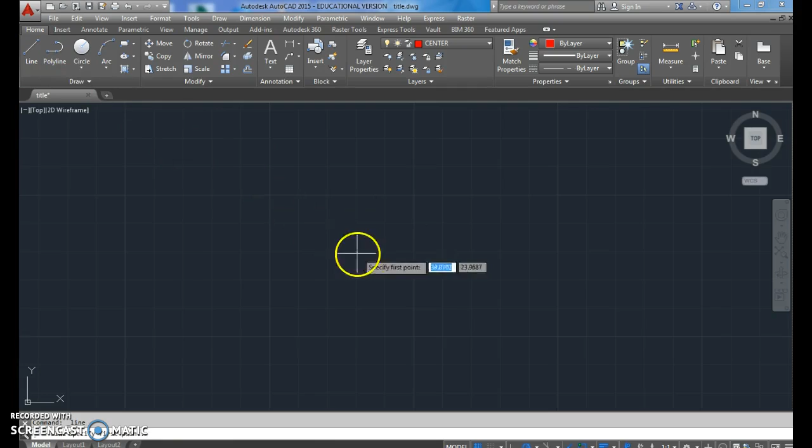Alright, I'm going to start with, actually I'll start with the center line. From center point to center point is 3.75. On the end, I'm going to make some object circles. Try to get a center diameter. Alright, the outside circle is a 2.5 diameter circle.

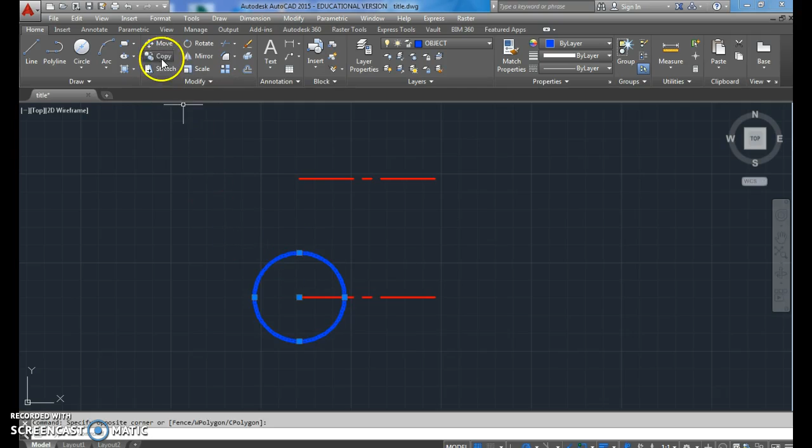Alright, this is going to be my front view. I'm going to do a top view. The length is going to be the same, so I'm just going to copy it up, keep it lined up. And I'm going to copy the circle to the opposite side. Right, the reason is they alternate which way the circle on the end is. So we can use these to get the overall length.

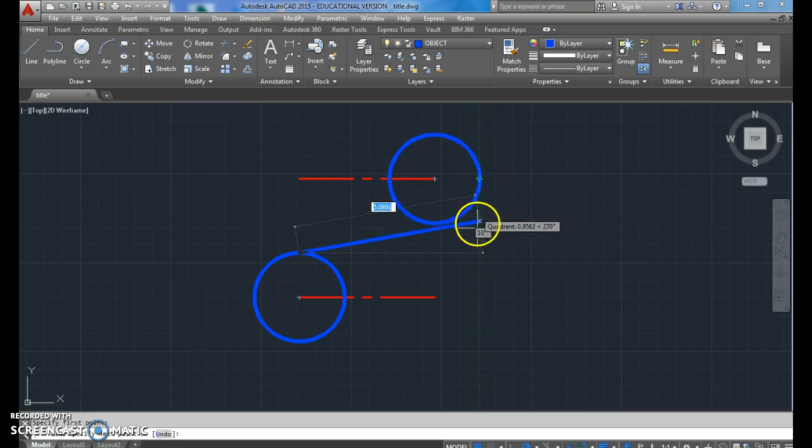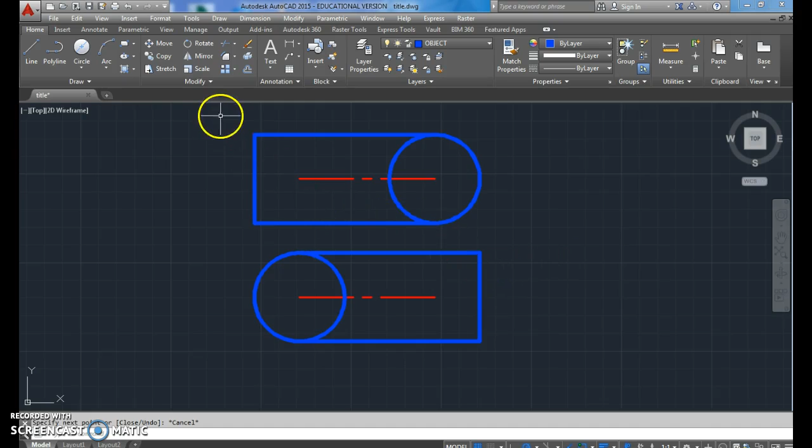So I bring the top here, bring the edge down, do my height 2.5, and connect back. I do the same thing for this one. And I'm going to end up turning one of these into my section view. I'll give you a little hint. My section view isn't going to be the right side because it's not going to show very much detail. I'm going to trim this part of the circle.

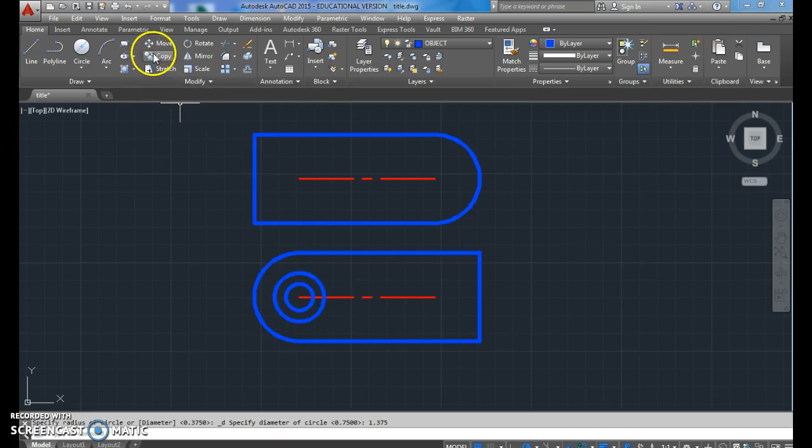Alright, now we'll do the counterbore hole here because that's kind of the next easiest thing. It's going to be 2 circles, and from the end here, here and here, they're going to look the same. So you're going to have a 3/4 diameter, and you're going to have the bigger one, which is 1.375. So, like I said, they're the same. So instead of doing from scratch, I'll copy them up.

Alright, now on this opposite side, there is a notch, a groove cut out here. It's not a square groove, it's actually a rounded depth in. So it's like I had a larger circle that's cutting through the inside of it. It's a little hard to see unless you're looking at the paper, so hopefully you have the paper with you.

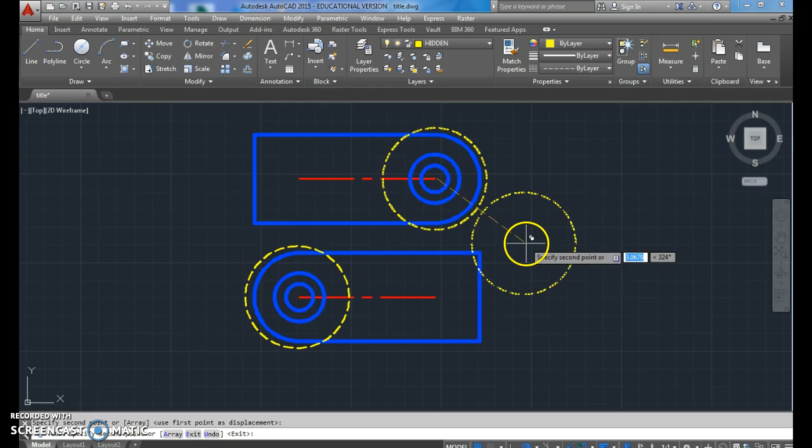Alright, so to know where that would be, in a hidden line, I'm going to make another circle. It tells me that it is a radius of 1.44. So I'm in diameter now, so I'll just double it. So 2.88. I will copy down to there. And I will trim where the hidden line goes outside. Now, that hidden line is there. It's where it should be. Basically, all the stuff you can see in between the sandwich, it's cut in and it's rounded like that.

So if I bring down here, I'll draw a line. I'll have to delete part of it. If I go down 0.75, then the groove in the middle is 1 inch wide. Delete that. So basically it's 0.75 and 0.75, then you have that in the middle. These lines will connect out.

I will trim here. Now, that's where the edge is. The edge you can see. It goes further back, see, because it's rounded. So I'm going to bring down the hidden line, bring it over, connect, and connect. So I have that one there. So for all except for one small thing, this one and center lines is pretty much done.

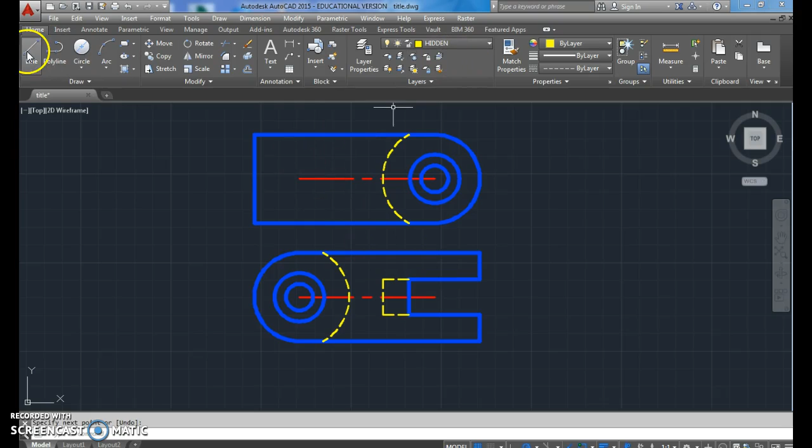The thing that's missing is the counterbore hole here. Alright, it's going to be hidden, so I'm going to bring from the edge of that circle down. The bigger diameter only goes down 0.312. Bring the other side, I get to line up, down, and then the smallest circle goes from where that one stopped to the rest of the way through. Alright, and it's on both sides, so I'm going to select that, mirror, I'm going to mirror along the center line, and so I have those there.

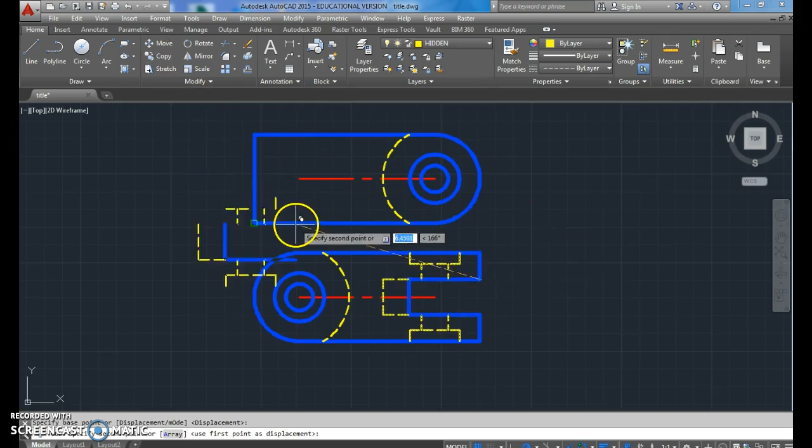Now, all this is the exact same on here, because it's the same from both ends. And since we've been doing it this way, I'll do it normal, and then we'll just come back and cut one and make it a section. So I'm going to select all this. You can do it manually, I'm just doing this to save myself a little time and effort. I'm going to bring it over.

Now I brought this line so that when I rotate it, I have a reference, because the end of this line is going to be in this corner. So I do rotate and flip it this way. Now I do move, select it, grab that, that goes in the corner, and that part's done. All I have to do is trim this little bit of object line there.

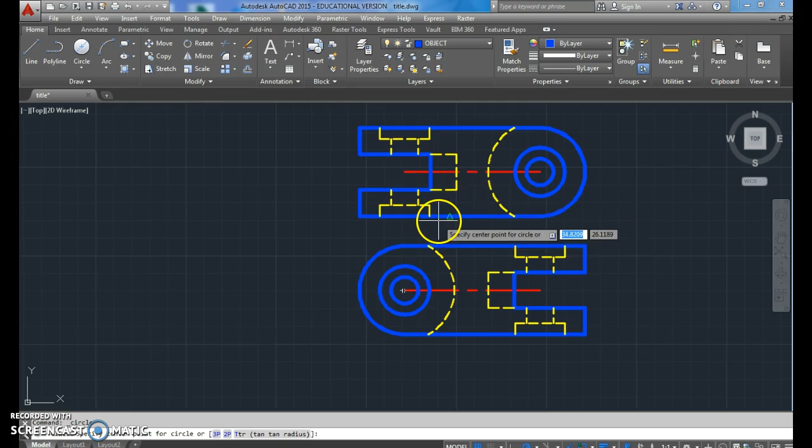Alright, now the only thing that is missing is the hole that's drilled through the middle here. And on the paper, if this was my top, it would be up here. I'd be able to see it. It's a circle, and from the center of the circle, it is in 1.875 inches. So to do that, instead of drawing a line, if I touch my mouse here, line it up until it's 1.875, hit enter, it will jump the center point over to that. Now that should be the midpoint of the center line, but just another way of doing it for future reference.

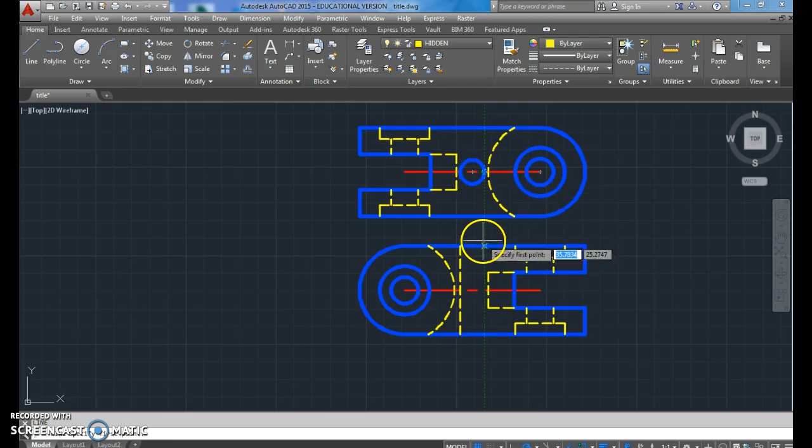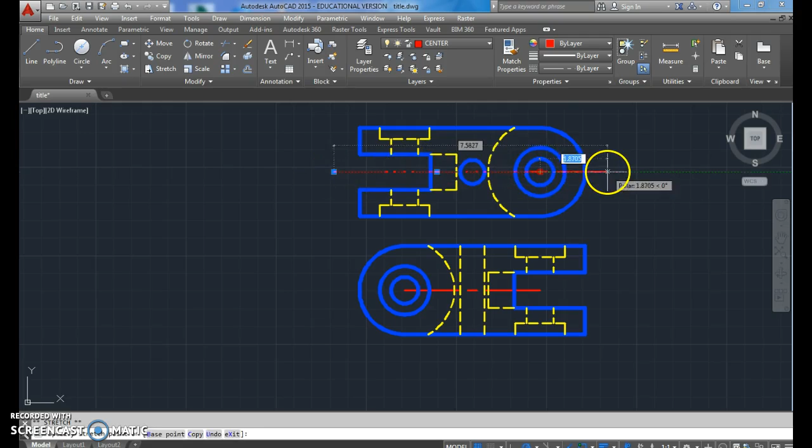Diameter is 0.675. So then I will take the edges of it, this hidden line down. Alright, so from here, again, there's center lines I have to add in, but I'm just deciding which one to make my section view. If I slice this one, I will get a little bit more detail than if I slice this one. So I'm going to extend the center line, change it to section,

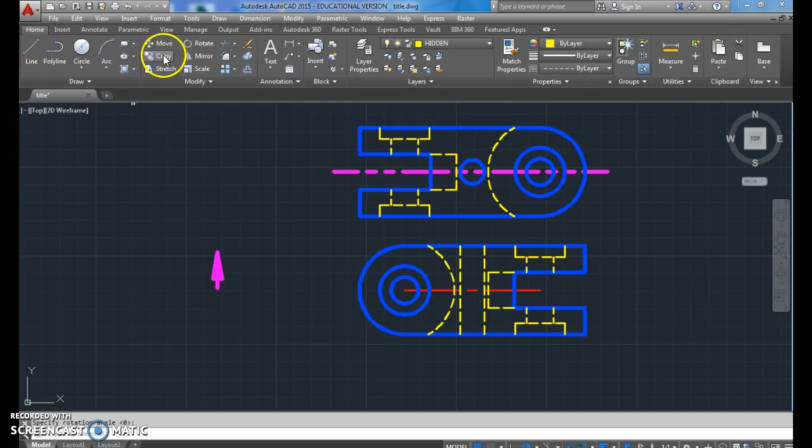add in my arrows, escape that one. And the arrow is going to face up. So I'll put them on the ends of the lines. Alright, now in here, I'm going to change all the hidden lines to object lines.

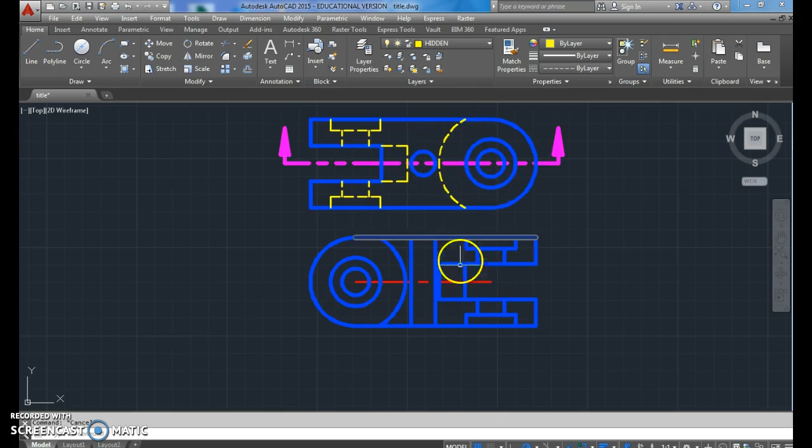Alright. This edge, because it's being cut through there, was here, but it's no longer there. It will be on the back side, so you'll leave it in there, but this is going to be empty space. You have your hole here, this circle you would not see whatsoever, because if it's cut here, you see the small one, but you won't be able to see that one on the far side.

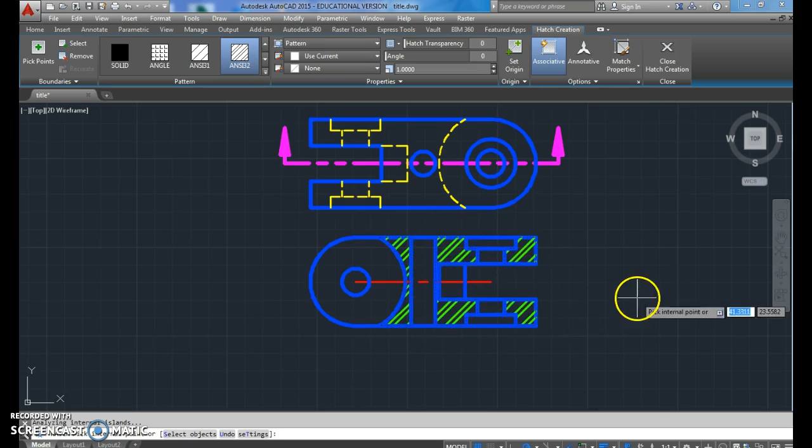So I'll add in my hatching, and I'll do ANSI 32. This all is empty space. This would be solid and cut through. Hole drilled down to empty space, solid, and solid. And so that's my section view for that one. Alright, for future reference, if you had them in already, you're fine. I didn't dock your points. You don't really need center lines in section views. You want to try and simplify it the best you can.

Now in my top view, let me add in my center lines. Got one there. There. One through there. So those are all my center lines. This view's done. This view's done. I just need to do my right side. Bring this over. Right, from the end, it's going to look like a 2.5 by 2.5 square.

I'm going to be looking into this end here. So I'm going to have object lines for this groove that's cut through. Alright, the counterbore holes, I'm going to have some here, I'm going to have some on the sides. I'll do this first set first. They're going to be hidden. So again, just to save time, I'm going to copy the counterbore holes from here. Bring this set over. And I will move them there. So I have all this here.

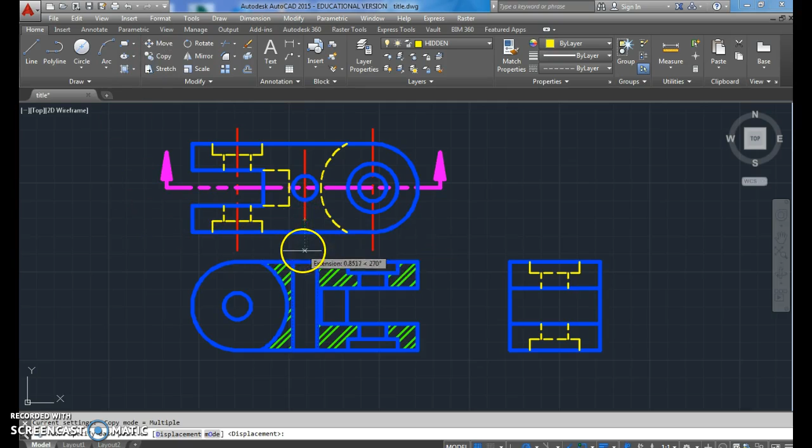I'm going to make the hidden lines for this hole that's drilled through. And I'm going to cheat here again. I'm going to select those. They're going to end up hidden, but I'll leave them like that for now. Copy. Bring it down to grab the midpoint. Put it on the midpoint. And they are just a little bit inside of these hidden lines. Change them to hidden, and they go all the way top to bottom.

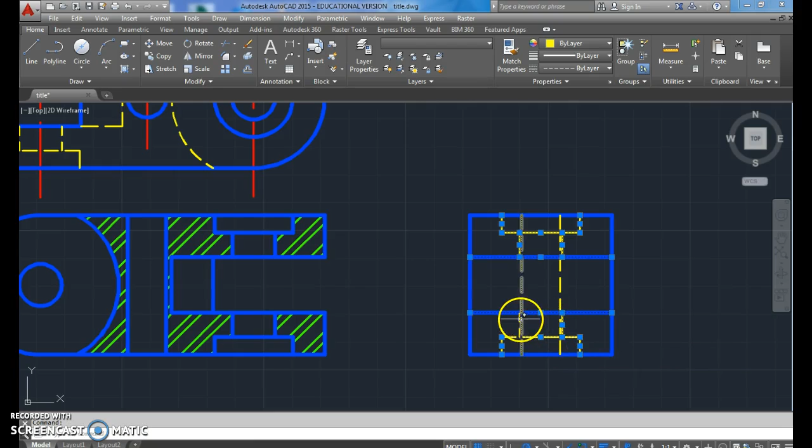Now, there's a set of this groove that's cut vertically right here on the far side, and the counterbore holes are going the opposite way. Again, can do it from scratch. Much easier way to do it though, because the spacing is the exact same. So I'm just going to copy all of these parts. Oh, I got an extra line in there. Get rid of that. No, I'm missing one line. I'll be able to add that.

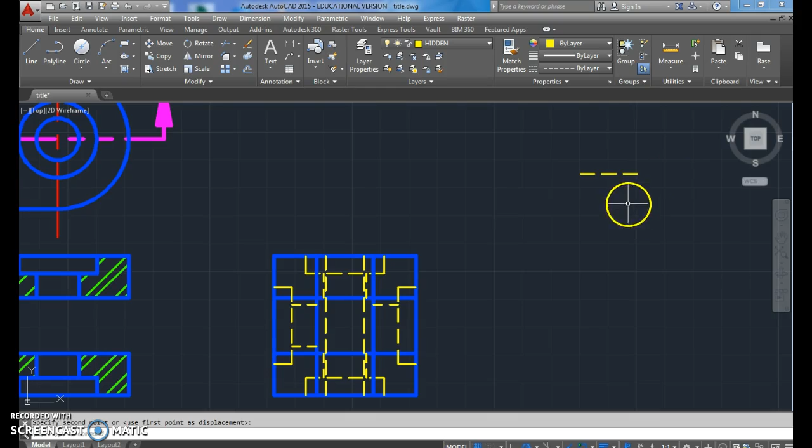I'm going to rotate 90 degrees. I'm going to do move. And let's see, make it easy. I'll add a little line in here that I'll then delete. Alright, so if I do move up here, use my reference point as the midpoint of that line. Click on the midpoint of that line and delete that.

And the one line that I messed up and didn't bring with me, I can then bring it over and place it. And from there, it's all done. And that's what the views will look like. You'd have to add in your dimensions, but once you get that one done, you can also print that one out.